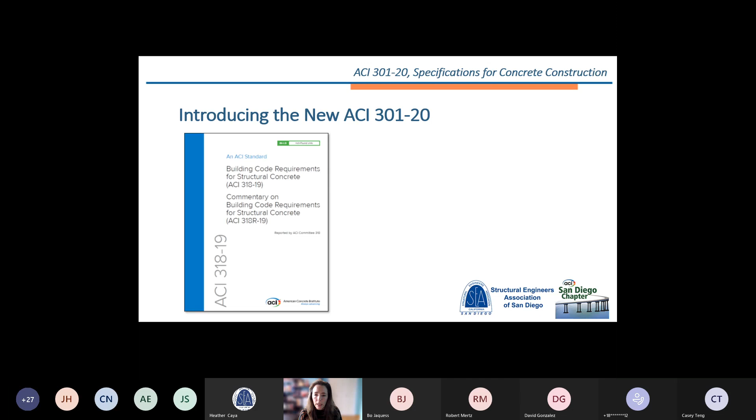So what I want to cover today is what are really the goals of a specification, what are the ACI standards and codes that are related to 301, and then how to properly reference ACI 301.

So the goal of any specification, it doesn't matter if you wrote it or if it's a cookie cutter from days gone by, you need to really rehash those and make sure they're up to date. The goal is that they are clear. We don't want to get other people involved that don't need to be. We also want to make sure that there's only one single interpretation of the meaning of the sentence or the optional requirements, and that it's written in mandatory language.

There's a lot of documents out there that give guidance. I happen to be somebody who does quite a bit of those types of resources for our industry. They are not mandatory, they are guidance. They're state-of-the-art guides meant to give you guidance on doing a specification correctly. But this mandatory, terse language is for codes and standards, which is legal and cannot be misunderstood. We'll get into a bit of that as to why it's important to us.

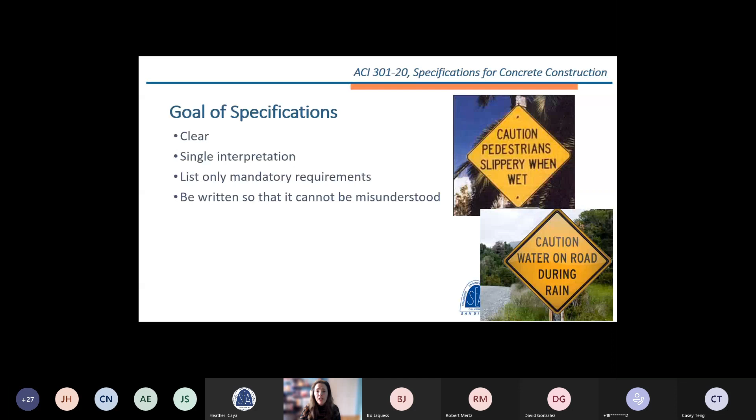There is a lot of confusion in specifications as to what complies and what is important in your defaults. So speaking of defaults, do you know them? Are you aware of all the standards that are out there in ACI? There are volumes of them depending on what you design or construct in our industry. Most people are aware that the majority of ACI documents default to the content that is within ACI 318.

301 is similar to that. We follow what is in the building code, but we also go beyond the scope of a 318 building commentary. Remember, it is the specification from the designer to the contractor, but there are also companion specifications out there, such as ACI 311.6, which is the spec between the ready-mix testing services and the owner. Also, ACI 117 is mentioned in 301, and those tolerances are brought into 301, but there are tolerances within 301 that 117 doesn't cover. So that's something to consider as well.

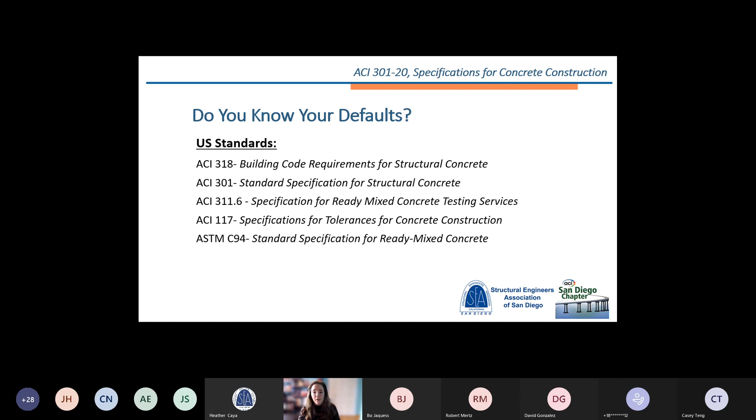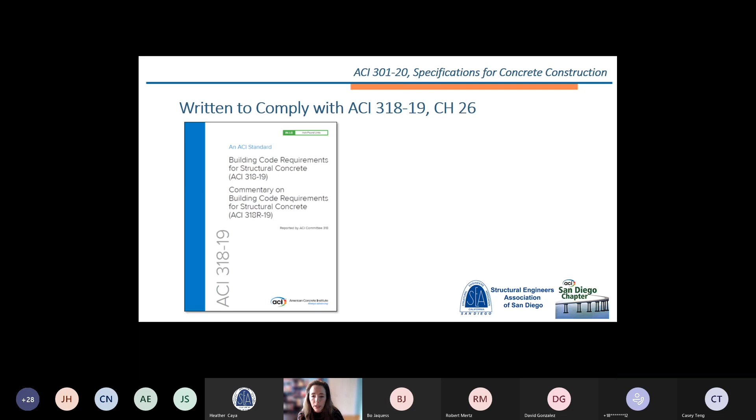And of course, ASTM standards are part of this as well, including things like ASTM C94, the specs for ready-mix concrete. So all of these are basically a big envelope that we must follow. 301 is written to comply with 318, Chapter 26. If you're not familiar with the reorg from the 2019 document, you really need to get used to it. They've rearranged everything where Chapter 26 is the construction requirements, and the compliance details within 301 have been updated to be aligned with 318-19. Most of these changes were included to reflect changes in the 2019 318, and we'll cover some of those today.

There are some current changes. What do I mean by umbrella? I think it's important to understand that each of these documents pretty much references the others. So there's a lot of intertwinedness, and making sure that they harmonize, making sure that they state what you want in your specification is important.

And it's also very important that you don't specify a code in a specification. That's for the designers using the code, unless you plan to design something such as post-tension concrete or formwork, in which case you might be specifying another type of document that is a design standard. But if you're writing to the contractor, you're telling them what they need to know, so it's important that you have that information.

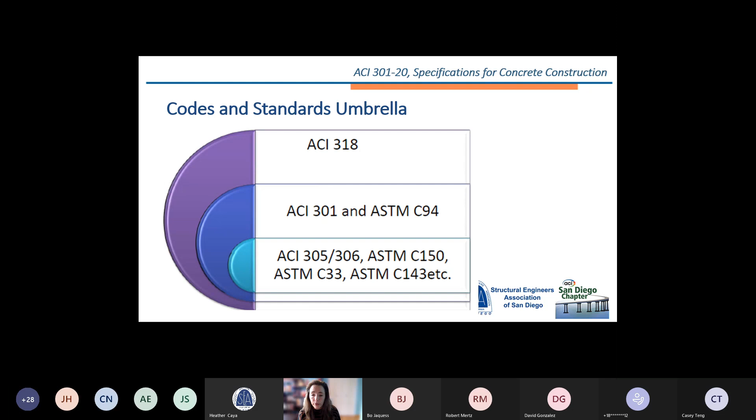Also it's important to remember ACI isn't actually a building code unless your state adopts it. California has adopted it through the IBC, but it's also important to look up the year that they've adopted. I'll be honest, I didn't do my homework, so you'll have to tell me when we get to the Q&A as to what year you guys are on, because it's really important for making sure that we are using current materials, current guidance, and there's reasons why these standards evolve.

Speaking of evolving, 301 has evolved over many years. Approximately every 5 years we update this standard, and we're trying to meet the 318 cycle about a year behind them, maybe 6 months depending on timing. That goal is because obviously we want to incorporate their changes into our document.

This is a standard that is reviewed by a technical activities committee as well as put out for public comment so that it can be used in contract documents. I've been on the committee for approximately 20 plus years. I don't want to age myself too much, and served as secretary from the 2010 to the 2016 cycle, and just stepped down as chair in 2020.

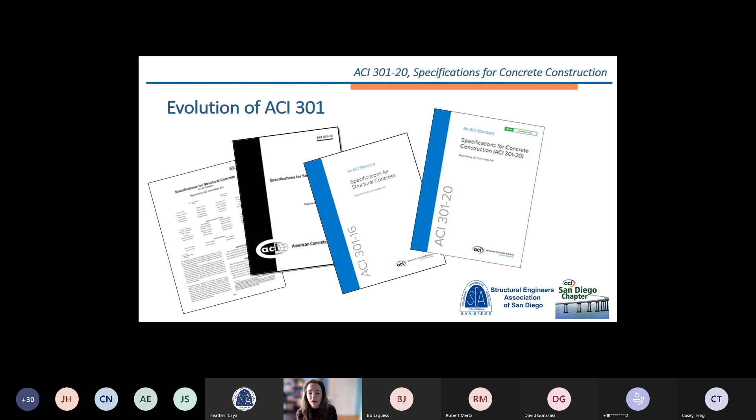I've seen a lot of change in scope. I've seen quite a bit of improvement in formerly prescriptive requirements that no longer need to be that way. We're not making a box that meets everything. We are trying to make very innovative concrete structures that need specific requirements that might be performance-based. So it has become a contractor-friendly document, but also has safeguards to make sure that the structure and application holds up.

It is a consensus. So how 301 and ACI works, for those of you who aren't members of ACI, and I hope most of you are, designers, concrete producers, material suppliers, builders, and we do have academics as well, and of course a few trade associations such as myself.

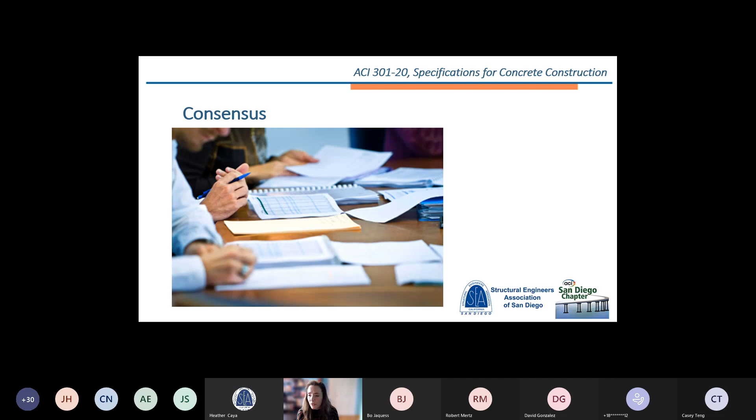Prior to COVID, we would sit in a meeting room for 3 days straight for about 6-hour stints to get these ballots handled and any negatives, and get the content brought forth for changing the language in the document. There's strong opinions from various sides, but it's a very balanced committee as ANSI standards require. What I found being a member of the committee and also as a leader of it is that if everyone is equally unhappy, we're doing it right.

Consensus means you're not coming up with necessarily a number from one side of the fence. You're finding some sort of consolation at times. So it may not satisfy a certain side. It's satisfying the concrete. The important part is that the concrete turns out.

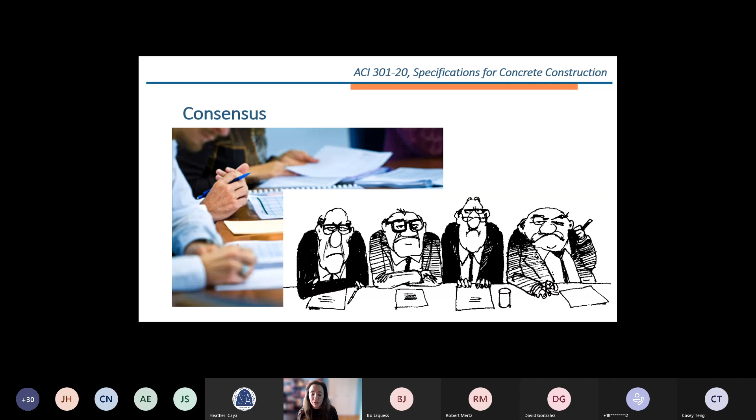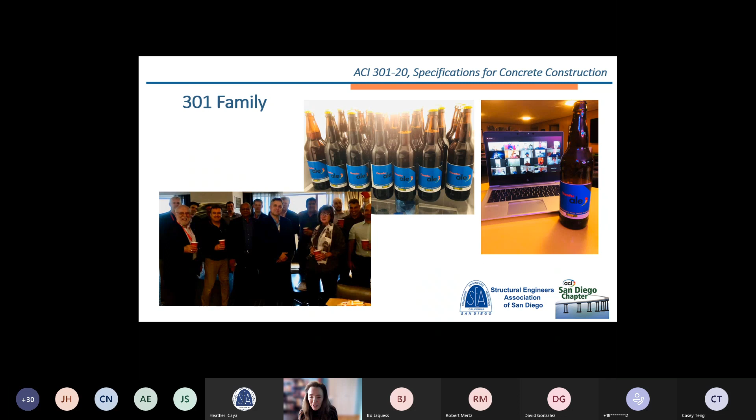But I don't want to say that we weren't a fun committee. There were some very hardworking, very smart leaders in our industry on the committee that it was a joy to have such strong brains putting forth the information. But we also tried to have fun. Pre-COVID, we would get together after every convention and spend some quality time in a nearby location. And since then, we've had a few virtual, but we brewed our own beer and had some fun. So it's not all work, it's a little play too.

But while we are working, we are following the MasterFormat guide. So 301 is set up to work with most architects and engineers' office documents, which typically follow the Construction Specifications Institute standard of a general section, a product section, and an execution section. If your documents don't follow that, you probably need to look at them a little closer unless you're a different type of entity, which we can talk about during the Q&A. But remember that CSI has over 50 divisions, and only one of them is cast in place concrete, and of course they have precast as well.

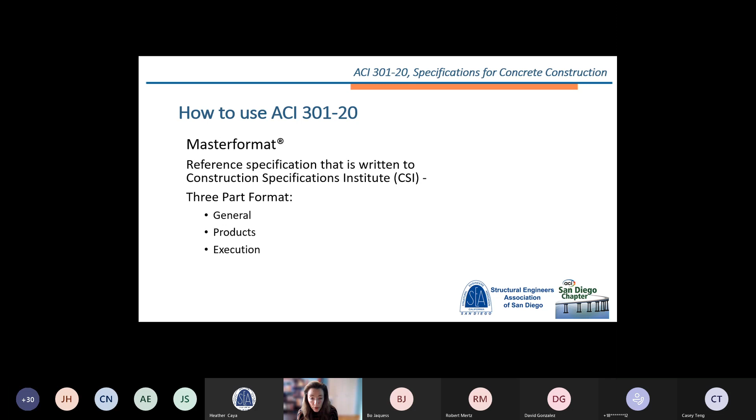ACI covers many different special applications of concrete, and of course 301 is one specification for concrete for ACI. They do have some very specialized specifications as well that are not within the scope of 301.

So how does 301 work as a contract document? It's really important that you all get a copy of it. It's 69 pages long, but only 53 pages of it are the legal document, which we would call the body of the specification. That's the language that gives direct instructions to the contractor. But there's also a really important part of 301 that many people aren't aware of.

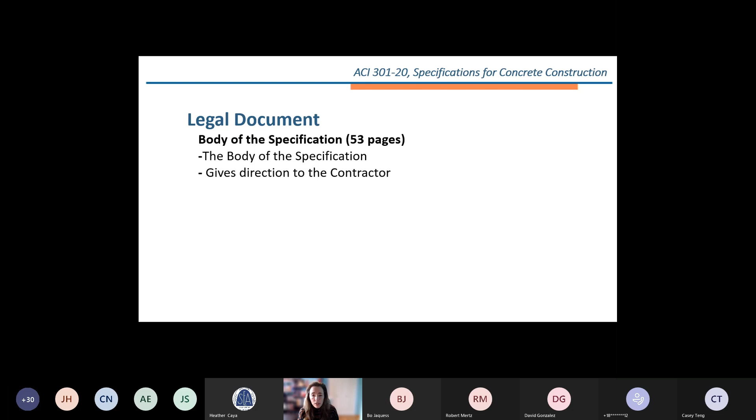This isn't a closed document. This is a default specification where the designer has to make decisions, just as you would if you worked with 318 and many others. So there are directions to the specifier in the back pages of the document. We call those checklists, and there's mandatory requirements to review, and optional requirements to review. Those are very important to look over.

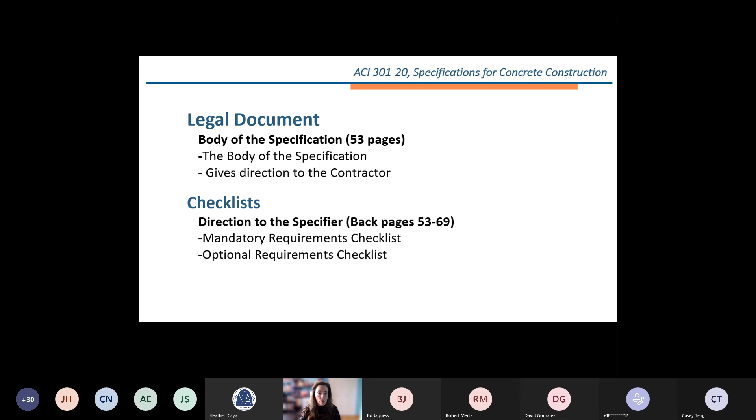We'll get to them. Now, within the main body, the first 5 sections could complete your structure depending on what you're building. They include your general requirements, which have your testing and your references and other important requirements within the specification, such as definitions. And then it continues with formwork, reinforcement, concrete mixtures, and handling and placing.

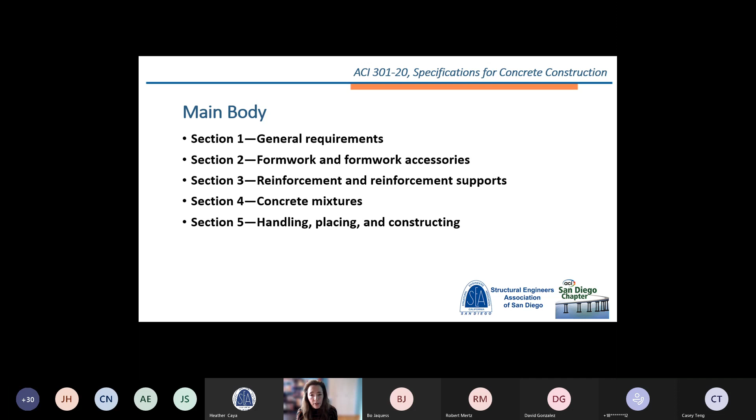So there are many other sections within 301, and those are what we call optional sections. It has to be determined that your project has this work on it, and that is up to the specifier to determine and designate on the project which portions are, for instance, architectural concrete or mass concrete or precast architectural. Then suddenly that section would become mandatory within your document. So that's an important part.

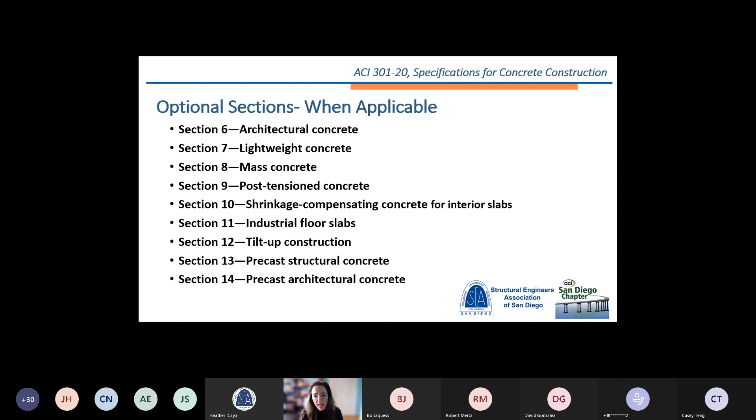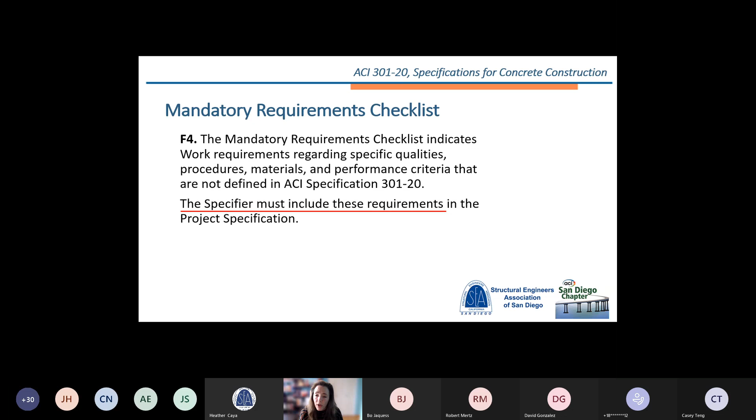So within these checklists, there are a lot of different decisions to make. In the mandatory checklist, you have a lot of notes to the specifier that you have to decide, for instance, which sections you're going to use. You have to define strength of your concrete. It's the trigger language that will help you with that, but really just review the checklist and then go back to each section.

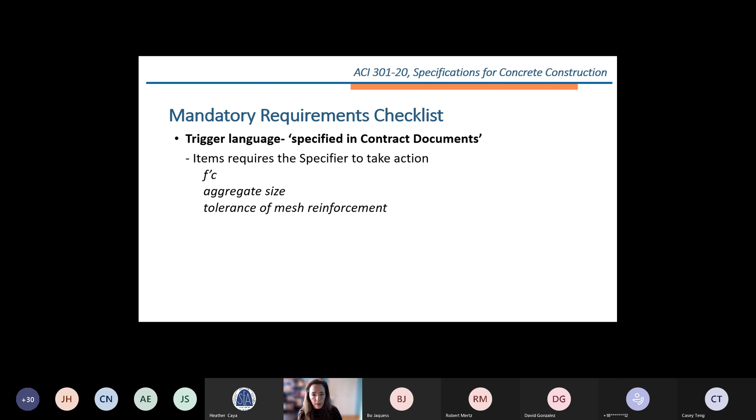Look for things like 'as specified in the contract documents' or 'unless otherwise specified' which will get you to the optional checklist. So the information you need to make decisions on, the common information, would be things like specified strength, maximum aggregate size, tolerances that are outside of 117. But the really important part as well is to make sure that you're designating any specialty sections within your scope.

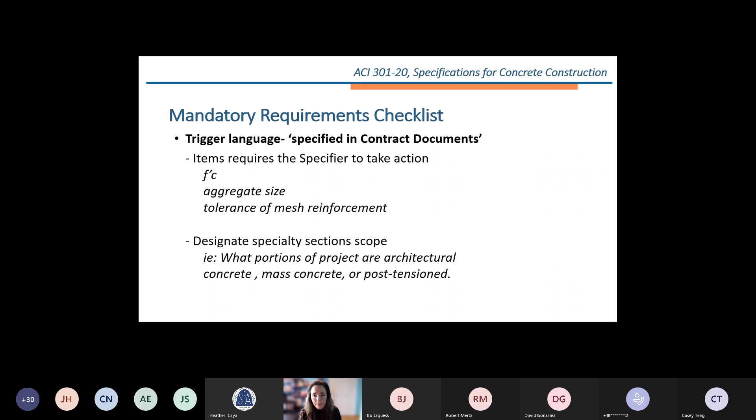And then on the other side is the options, and that trigger language is when it says something like 'unless otherwise specified or required.' Then you go to the optional checklist and make a decision as to what alternatives will become mandatory requirements in the document.

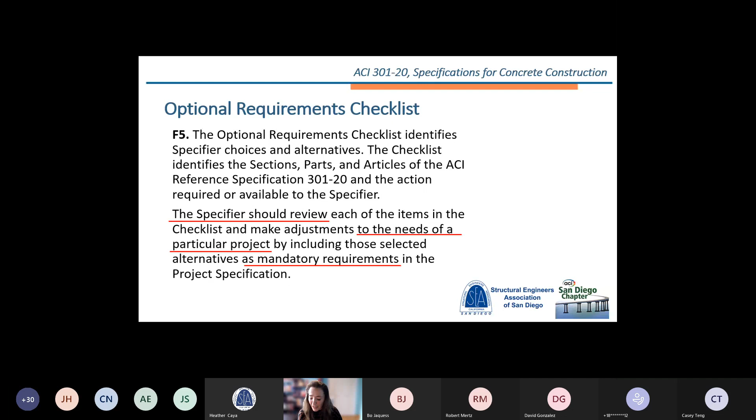Okay, so that's an overview of the way that we've constructed 301, and it's been that way for many years. It's the way ACI does specifications, and it's really important for designers to know it's an open spec. I will say that over and over in case you're not listening. But we've made changes. So what's new?

Well, the title has changed. Why we changed it was really important. We talked about it from last cycle. I'm not sure how many different standards you guys work on, but the why are you here, what's your purpose, what's your mission, are always important.

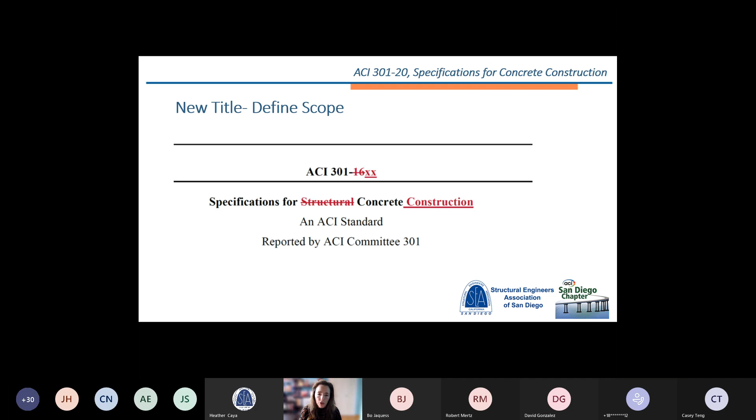So scope is important. And there were a lot of people that thought 301 should only be the specification for 318's scope. And there were many other people who felt there were reasons to include other content in it. Another example of that would be improving the scope to include the breadth of the document, such as industrial floor slabs and architectural concrete, which are not 318 concrete. So we changed the title to be more clear on that, and it is now Specifications for Concrete Construction.

So that was a bravo change to try and avoid confusion of our scope, which you can find in section 1. Another thing we did to avoid confusion, or perhaps to avoid lawsuits, was that we cleaned up a lot of the definitions. Definitions can be a point of contention. Definitions can make you designate work you probably don't have, or maybe you do have, and you're looking at the definition and interpreting it differently. So to avoid that, we've removed the definitions for portions of work, even though many of us would probably agree what is architectural concrete. Exposed to view can become a day-long conversation.

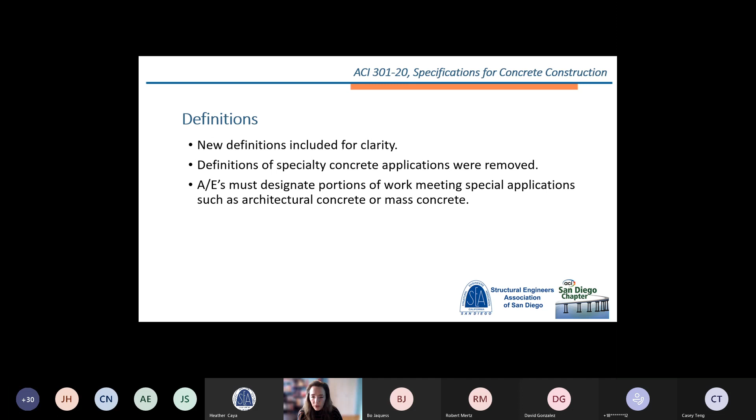Also, it's important that we properly designate what is the responsibility of the contractor. Another change in the document that I think has been a great improvement is there's now an optional requirement for pre-construction conference. There was a bid to make it mandatory, but I'm not sure why that became such a big deal. It's within the optional checklist to designate a pre-construction conference, and it tells you what criteria you have to meet and who needs to show up. You can't make people come to a meeting, especially in a virtual world, but it's important to cover this information.

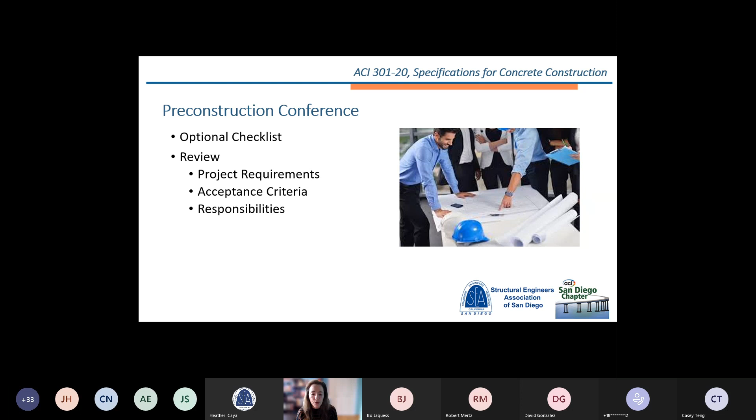We've also included some new material, mostly to comply with 318-19. For instance, there is now recycled aggregate within the document per ASTM C33. ASTM C33 updates its document every year, but there was a huge update in 2019, and that update changed the types of materials permitted within ASTM C33. So what that does is makes recycled aggregate permitted for use if you're not reviewing C33. That's why it's really important to be aware of standards and not just envelope them into your documents without knowing what you're referencing. If you do want to make restrictions, that's suitable. Recycled aggregate has been a proven material for many years, especially in buildings, but there might be some nuances you're concerned about for specialty structures, whether that's shrinkage or ASR, that you might qualify with some pre-testing.

All of these things can be done properly in a specification as long as you put the words in the document. Another thing now allowed in ACI 301 is mineral fillers. It's a rather new specification in ASTM C1797, and those are within 301. They're also permitted in ACI 318, and they're about to be balloted in ASTM C94. So once you have that envelope, you'd have to consider why you don't want to use mineral fillers. These materials can add to your mix design when you use all these new recycled products properly.

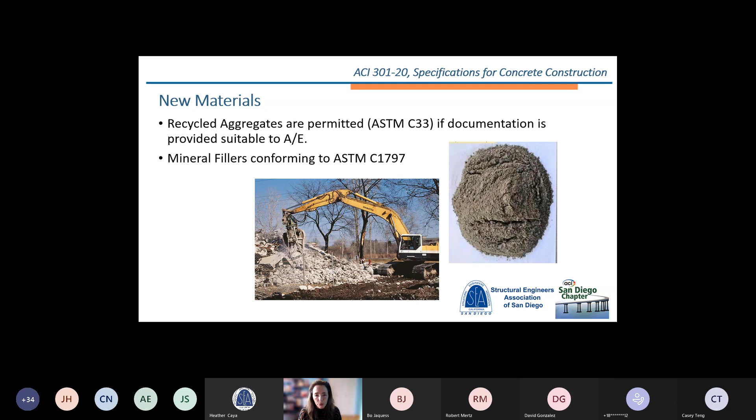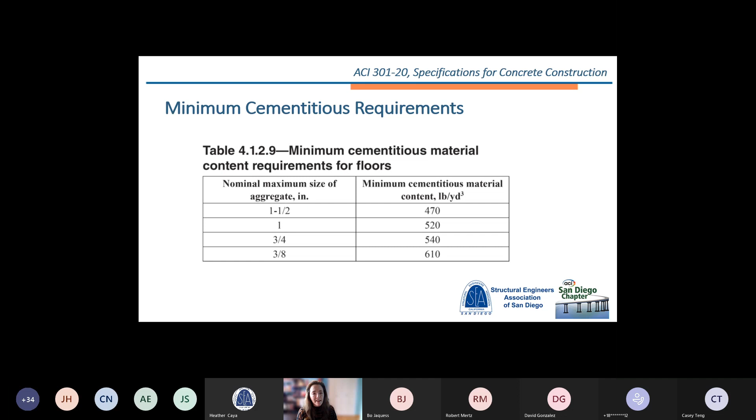So with that said, this table had been in 301 for many years, and it's now been removed from section 4, the concrete mixture requirements. However, it's still a requirement under the industrial floor section, because these prescriptive values have been so successful over the years that some industrial floors have had aggregate shadowing and other issues with abrasion resistance when you get too lean on your mixtures. But at the same time, when you spec something so prescriptive as a cementitious requirement, you've basically started the mix design and tied the hands of anybody being able to have some wiggle room on what they choose to use.

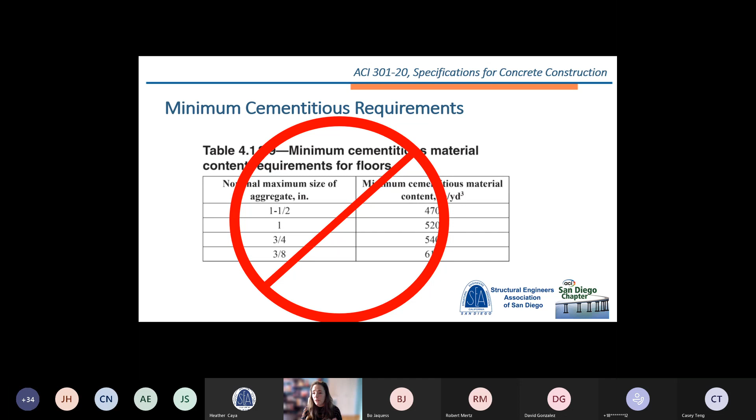We also have some changes in the aggregate requirements. The timelines for pre-qualification of aggregates were extended, and data on compliance, for instance for alkali aggregate reactivity under ASTM C1293, now needs to be within 24 months. That makes sense if you know the test—it takes approximately a year to run. So if you can evolve it and cycle it, you should have data within every 2 years if you're doing your testing correctly.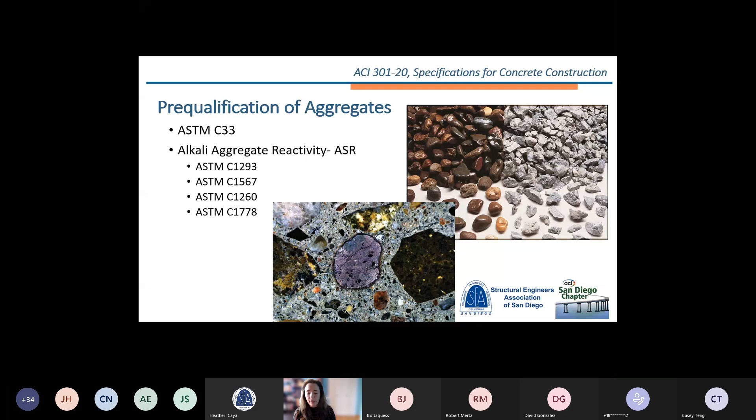There are also different limitations to the mixture requirements than was in the 2016 document, to qualify the mixture and reduce potential for ASR. So it doesn't just default to ASTM C1778, which is a new mitigation specification. It's really meant to be a pre-design type of specification, or for inspecting existing concrete, meant for prevention of ASR. The goal of 301 is to be able to properly test and design our mixtures up front. So there's different limits for alkali loading than there used to be, and different requirements on calcium levels of fly ashes and such. I can get you that information - it's straight out of 301 in section 4.

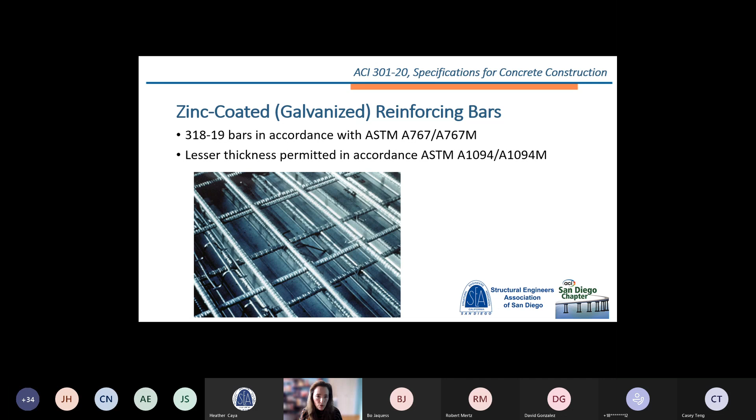Another change in the reinforcement section was that zinc galvanized bars were updated in their requirements in 318, and now have to conform with ASTM A767. That was changed in the 2019 code. However, there are times you're not using rebar that needs to conform to 318. There's lots of jobs out there that have light steel or different types of steel in them that are not 318 concrete, and those may be allowed to conform to ASTM A1094. The major difference between these two standards is a different thickness in the zinc coating, so when it comes to corrosion protection, those standards have different levels.

Another new application in 301 is shotcrete. Shotcrete was added to 318-19, and they made many changes to the testing requirements and all of that in 318. How 301 handled it at this time - because we felt it was very cumbersome and could be misleading to suddenly put a bunch of upfront testing - we clearly state that if you're using shotcrete, you need to design and construct in accordance with ACI 506, which is the specification for shotcrete.

Some people really wanted to bring specific language into 301. We weren't quite there by the time we were publishing, so I think there might be some evolution of that in this next cycle. But really, if you think about shotcrete, it's just a different form of placement method - the concrete's still concrete once it's hardened. However, it is important to remember that while it's a different form of placement, there'll be different testing and acceptance criteria with shotcrete than there is with your conventional acceptance testing of concrete.

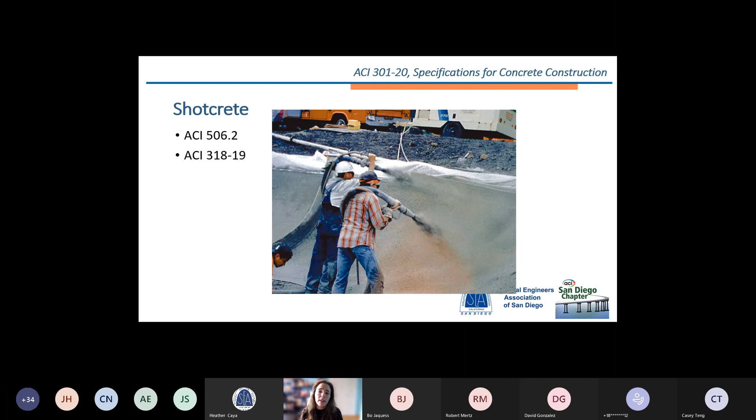Along those same lines is self-consolidating concrete, which has been in 301 since the 2016 document. It's been around for much longer than that, but there's been quite a lot of advancements on the ASTM side with self-consolidating concrete. So in the 2016 specification, the slump and slump flow requirements were kind of combined in the same paragraph, and may have been misleading to an innocent user of SCC, so those were separated out for clarity.

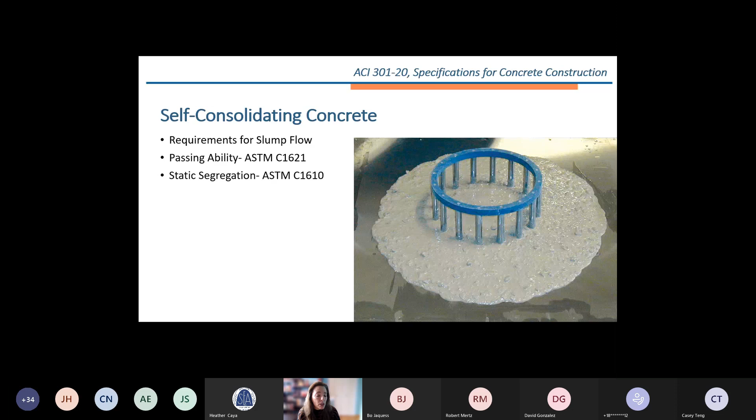Without requiring pre-qualification of the mixtures in 301, it does give an optional requirement if specified that passing ability and static segregation need to conform to ASTM C1621 and 1610. So that's a good improvement to the document. There could be a lot more if you really wanted a spec specific to SCC, but I think that really covers the minimum criteria that you should have on SCC in any document.

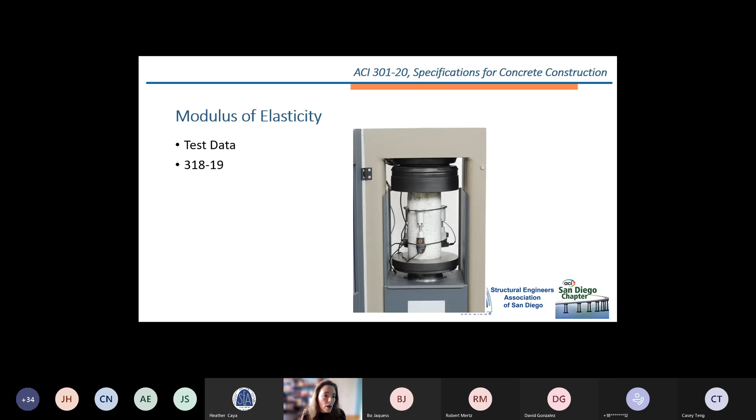Another change in 301 is the modulus elasticity requirements. Those were never mentioned in 301, and there are a lot of tall buildings being made of concrete as a preferred material, and instead of being designed by strength, they're being designed by modulus requirements. So test data may need to be pre-qualified, and then there might even be testing requirements on site as well. So this needs to be considered, and that's all new, and also a new change in 318-19.

Some improvements to the document in section 5 on construction: it had in 2016 changed the surface finish requirements to a set scope of surface finish 1, 2, and 3, and had various types of defaults for requirements of amounts of allowable bug holes, those types of things, and what types of repairs were required. Now we have a default for finishes of SF2, and we've definitely clarified color, texture, and other types of finish requirements have been cleaned up so that there's not arguing over aesthetics.

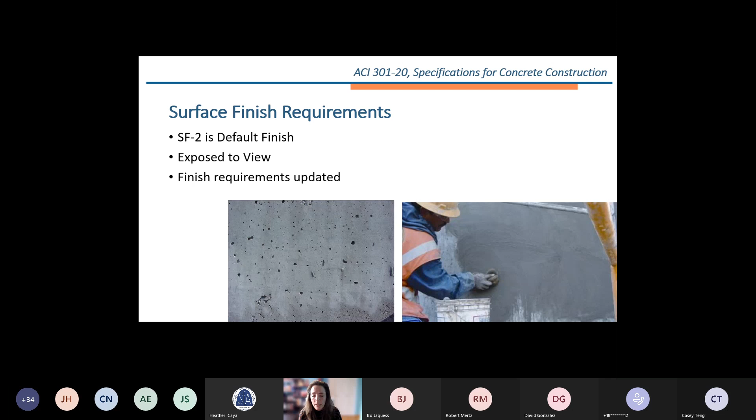Now, if you are arguing over aesthetics, mock-ups are also an option for section 5 concrete. They become a requirement in some of the other special applications, such as architectural concrete and tilt-up concrete. Speaking of tilt-up concrete, unlike surface finish that you're typically casting in a form, these are specific and could be architectural - so these are panel finishes, slightly different than the SF2.

They change and add the P to them, but it's a very similar requirement level unless you're doing architectural as well, and then you're calling in Section 6, which has much higher scope of architectural finishes. Just like in Section 5 for repair, you have to specify what level of cracking—specs that just say no cracks allowed really need to require what level of finish is allowable, what size, any type of void or anything that's allowed. So that's all stipulated in Section 6 and in Section 12 on tilt-up.

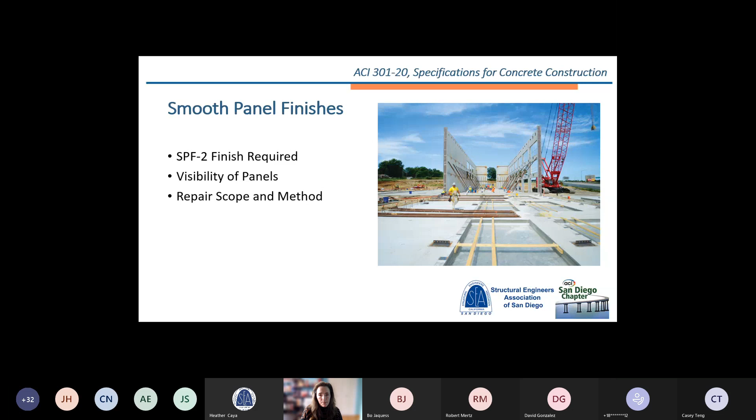And there are mock-ups required in Section 12, so that helps for tilt-up.

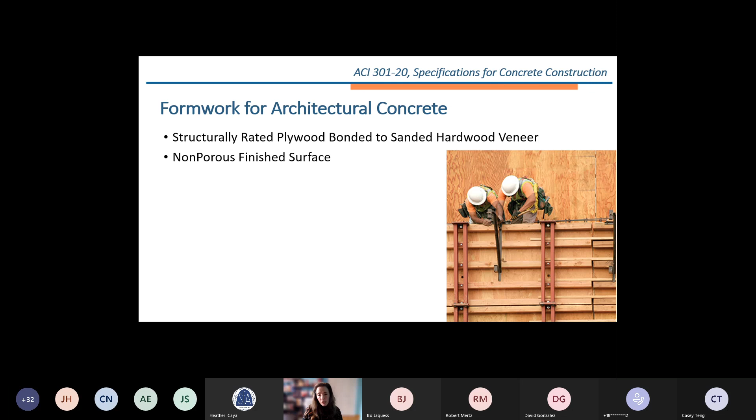Speaking of formwork and making sure you get a correct finish and good quality finish, one of the changes in formwork—we really didn't have major changes in the formwork section. We had talked out and balloted quite a bit, such as waffle forms, and we can't talk enough about chamfer, but there isn't many changes in Section 2, with the exception of we did change a requirement for the porosity level of certain types of veneer for your formwork if you're using wood formwork. That was because the quality of certain products was changing throughout the United States depending on shortages and such. So that's something to consider.

There are also new requirements in the 2020 version on adhesive anchor certification. Adhesive anchors were in the 2016 edition, but the certification program came out afterwards and is now in ACI 318-19. So if you have adhesive anchor holes that are horizontally or upward inclined, and they're being sustained by tension, it's required that they're installed by personnel that is ACI certified. So that's a new change to the document.

There are some other certification requirements in 301 that you should be aware of. Most of those are from previous 2016 cycles, such as PTI certification and, of course, ACI's field level certification and such.

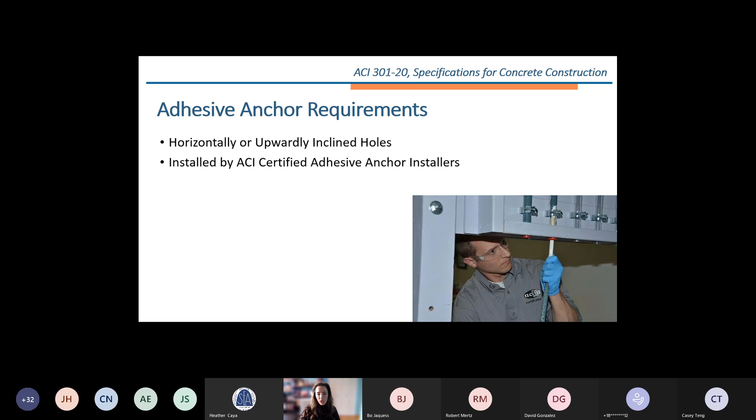On the mass concrete section, most of those changes were done in the 2016 document about a thermal control plan and differential temperature, and of course upper temperature limit for concerns of delayed ettringite formation. Thermal cracking is really a larger concern with mass concrete.

With that said, there were many material restrictions that were removed from mass concrete. A lot of people specify mass concrete as simply: don't let your temperature get above 70 degrees Fahrenheit and don't use type 3 cement. Well, it's 2021, and you can use all sorts of cementitious ingredients, including silica fume, because maybe you're making a thin bonded overlay. But the cement factor and the heat—which, by the way, silica fume doesn't have as much of—is maybe going to get you into the realm of needing a thermal control plan. So mass concrete isn't just about thickness of section, it's definitely about cement factor as well.

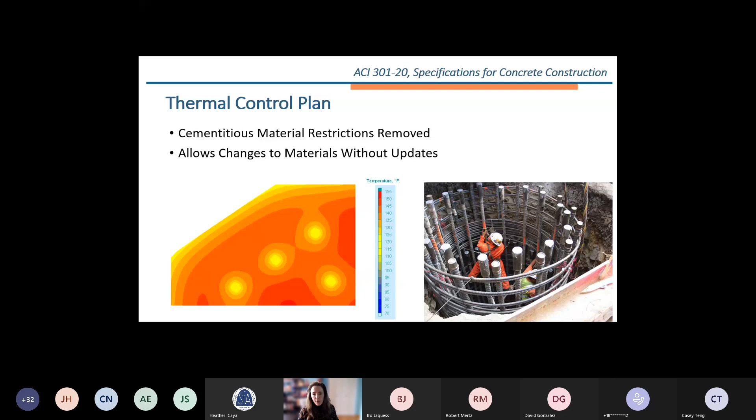So the spec now allows permissible changes to materials and encourages a thermal control plan to be required. With that said, you might have...

Some curing requirements are within Section 5. We debated certain requirements in the document, such as ACI's curing by ponding. There's been a rule of thumb in our industry for many years that ponding temperature shouldn't vary more than 20 degrees from the surface temperature. We debated that for many years—there's been a lot of research studies in ACI, and we're concerned about thermal shock, which is why we want to control that temperature differential. But really, the temperature differential that works as a rule of thumb for most projects, specific to your project, is that 35 degree F temperature differential. So we're saying that if it's ponding water, you don't want cold water so that you get a thermal shock issue as well. And again, ponding is not allowed in mass concrete, but that was already in the previous spec.

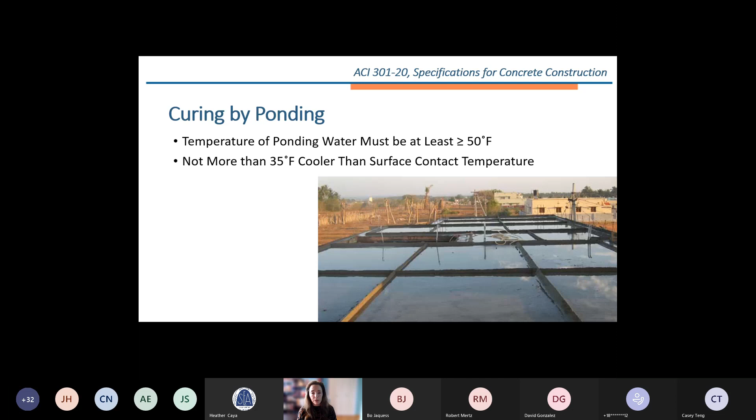Internal curing is new in ACI 301. It wasn't covered previously, so it defers to an ASTM standard, ASTM C1761. The difference between it and some other standards is it's limited to pre-wetted fine aggregate and does not include coarse aggregate.

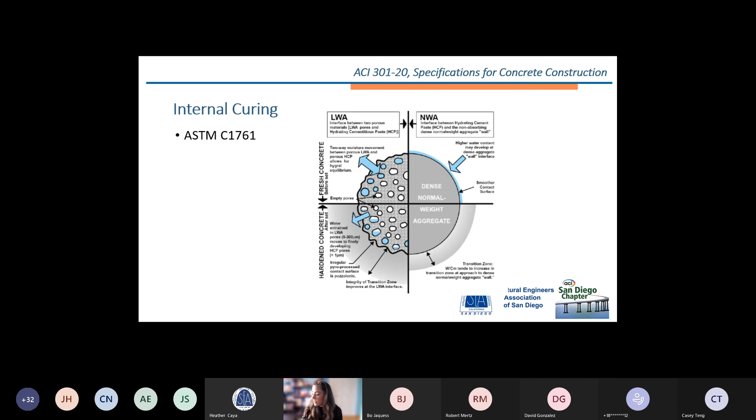On the cold weather curing requirements, there are some changes to the temperatures of embedded elements. For any type of metallic element coming through the concrete, we want to keep that temperature at least 10 degrees Fahrenheit. A lot of times it would say don't allow it to be less than 32 degrees Fahrenheit, which is good for contact surface temperature of soils and such. But there's a lot of research out there, including CRSI, that shows that metals themselves, which obviously are a conductor of heat, do not need to be 32 degrees to place your concrete. So it's just something to consider as you're placing your concrete.

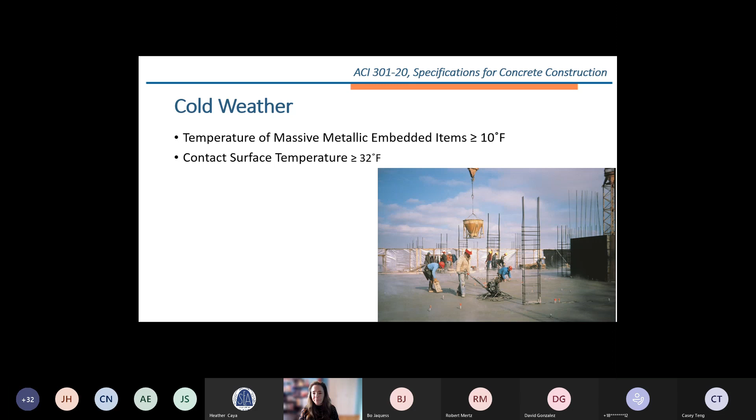Now, another thing that changed, and this is in the industrial floor section, is the qualifications of joint fillers. They now are very specific, saying they need to be 100% solids. They need a shore hardness of at least 85%, and that's within ASTM D2240 for a specific type. So it's upping the level of joint filler that's used in industrial floor slabs.

And then we want elongations that are below 90% within ASTM D638. So all the shrinkage requirements in industrial floor slabs are within ASTM C150, and there's a few other, 157, I should have said. There are a few other requirements within industrial slabs, of course, for flatness and levelness, but there weren't too many other changes because that got an overhaul in the 2010 document.

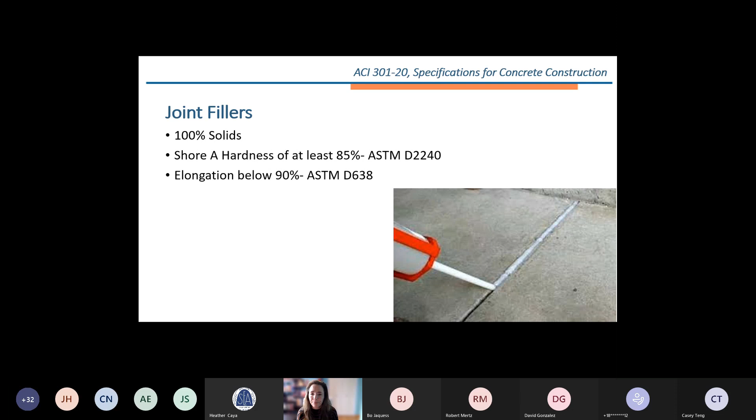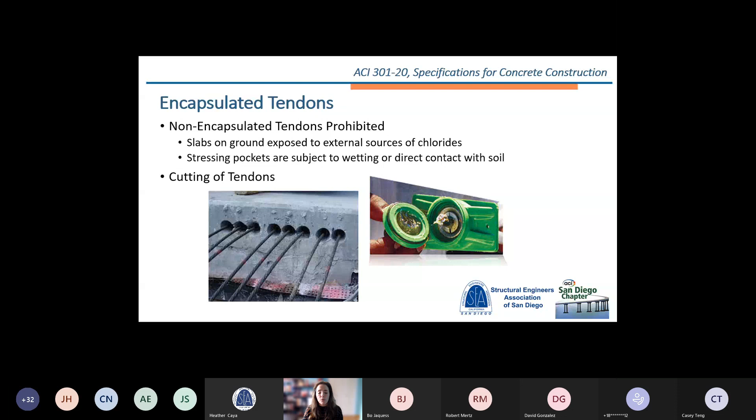There were some changes on the post-tension side as well. Those changed in ACI 318 as well. Non-encapsulated tendons are prohibited in 301, and all of these caps need to be properly, whether they're filled or not, depends on your design requirements. But we also changed some provisions on cutting of tendons. Some people were concerned about the torches and such. So it just gives recommendations without telling you can or can't use certain types of old school cutting mechanisms.

There are also some fabricator qualifications on the precast side that you should be aware of. There is an alternative certification program from the National Precast Concrete Association that may be allowed for your type of application of a precast, whether you're making anything structural or not. If it's pre-stressed, it has to follow PCI's certification program, but there's many structural products that are non-pre-stressed that can have a suitable alternative certification program.

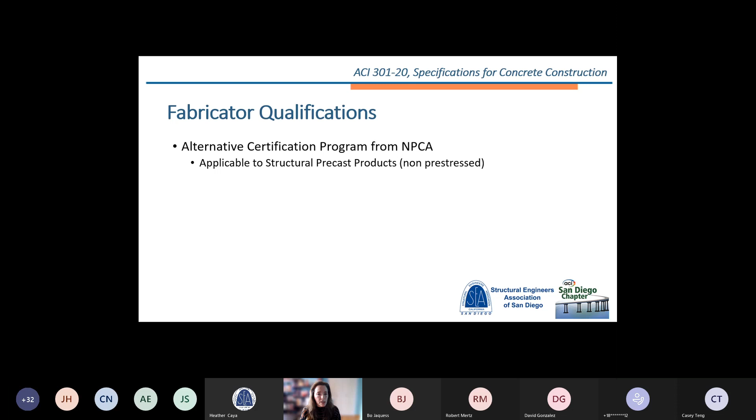That's a quick overview of a ton of changes in 301 without getting into the nitty-gritty of the whole document, because I want you to read it. You need to open it up. You need to see what your defaults are. You need to avoid the confusion that's often in there. And I go to sleep at night worried that the only people reading 301 are lawyers. And I think we've all been to those situations where people interpreted a sentence differently than each other.

We hope reference specifications cover everything for us, but without knowing what they actually say, how can you determine that? So for a designer, 301 is meant to tell you what your options are for performance. What do you really want? And then make some decisions. Remember, it's open-ended, lots of optional and lots of mandatory decisions to make. And then on the contractor side, you need to find out what you just promised by signing up for that job. And then for anyone involved, just remember there's more than one way to get the project done.

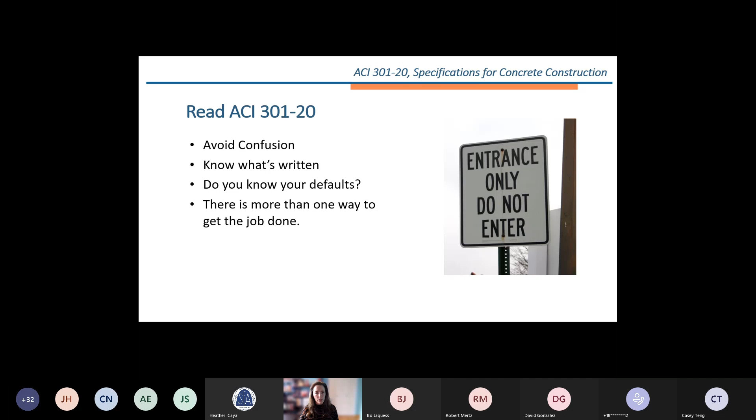And that's why we don't want to be too prescriptive in 301. It's really important to remember that this is a default specification. The proper way to reference ACI 301 in your specifications is to take the entire title. I encourage you, and it says it right up front in 301, to not take snippets of 301 or defer to specific sections of 301 because the document is meant as a whole. If you want to take a provision of 301 out, you need to write that whole thing into your spec and not even defer to 301 then.

Now, there's nothing wrong in your specification with deferring to 301 properly by saying the work will comply to specifications for structural concrete published by ACI, except as modified in these contract documents. And then if you don't like something 301 says, or your job is much more particular, then you put those requirements in to override the defaults in 301. And that should make a lot of sense to all of us.

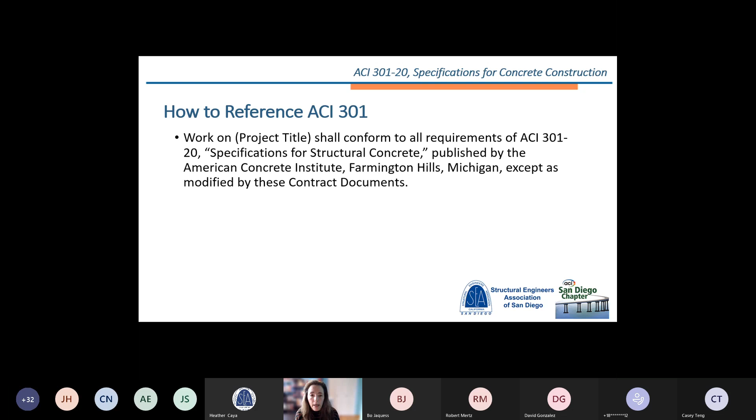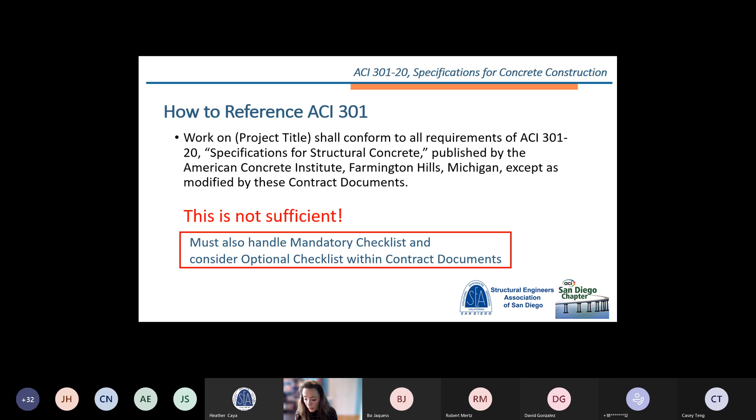And we need to know you're not done. This isn't the catch-all. You're not done until you go to the mandatory checklist and you consider the optional checklist for all the triggers and make those decisions, and then you have a closed document. Until then, you're up for a lot of trouble by defaulting to 301 without reading it. Now, maybe you think your company spec has closed all those loops, but just remember this is a 2020 document that has been updated to ACI 318-19. And so those type of construction provisions need to all be followed per code, per IBC. So that's important to us.

So the real goal here is that specs need to be clear. They need to be concise. They need to have the hoops that you want for performance, and then make someone jump through them. Don't ask for more than you need, but ask for everything you want, and people should be paid for that.

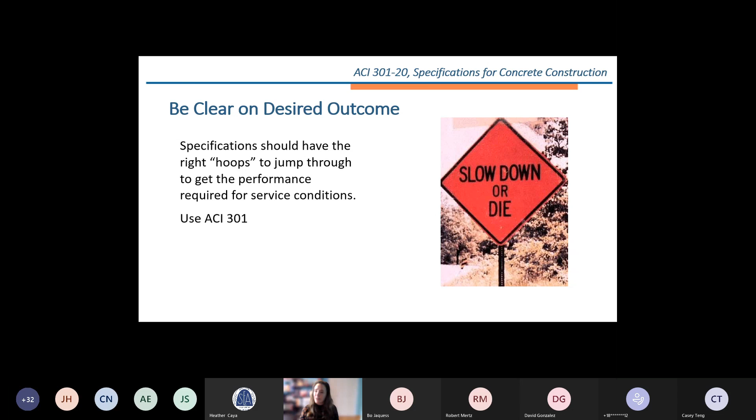And know your service conditions. If you produce a great spec and you update your specs and you default to 301, you're going to avoid conflicting and confusing requirements by knowing what's in 301. So with that, I'd like to open it up to any questions.

Right. Thank you so much, Michelle. Everyone's giving you a round of applause right now. So should I stop sharing my screen so that I can see you all? No, everyone has their video off.